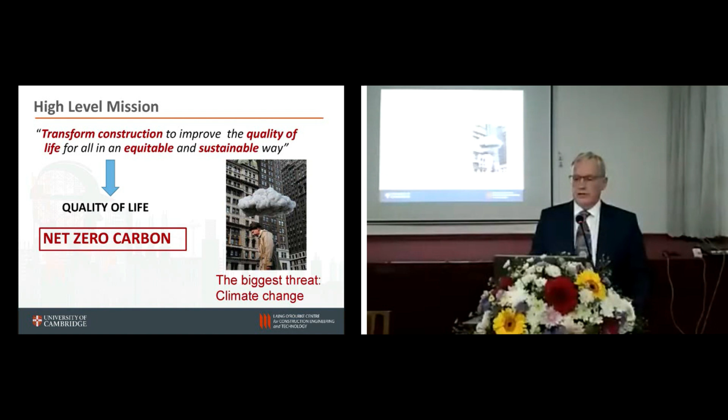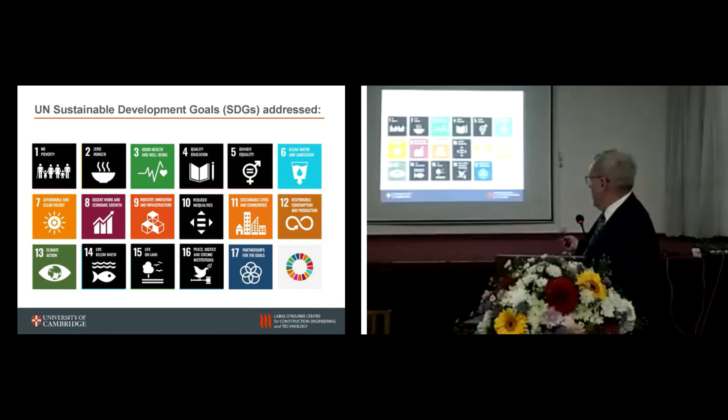So to start any lecture, and on the programs we do in Cambridge, I always ask lecturers to start with the following: put up the United Nations Sustainable Development Goals and say to the audience, which of these do we address and are trying to focus on during the lecture? I've blacked out those that are probably not so relevant, but you'll see quite a number of the 17 goals that are coloured reflect that the work we do impacts in different ways all of these things.

If you go through them, you'll see that we have such an important impact on society. Keep that in mind. Everything we do moving forward needs to be focused on how we improve the threat to humanity in our world from climate change. And remember that you are the future.

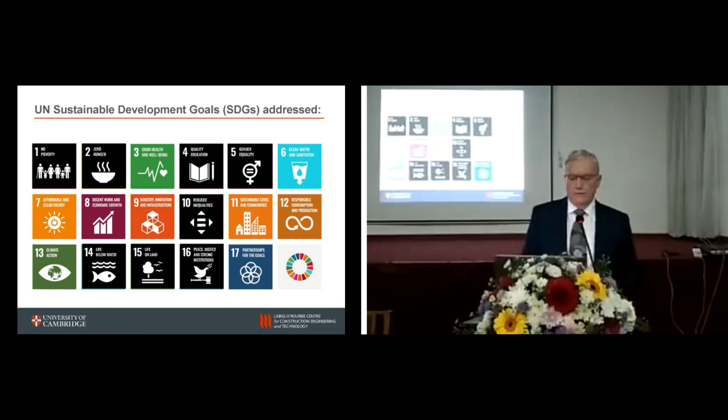So that's the background. What I'll do now is bring a few comments about this concept of data is the new gold, because I think there are many misconceptions out there about the value of this. So let's think about data in the context of the buzzwords you hear so often: data analytics, big data, AI, artificial intelligence, machine learning, and they're thrown around very widely.

In fact, these days in research, you'll find nearly every research grant gets submitted to do whatever, adds on the end, plus using AI and machine learning. Whether or not they do is a different question. So the question is, what are we going to do with that? Let's just think about artificial intelligence and machine learning.

Now, we're all familiar with the massive technology conglomerates like Google, Amazon, Facebook, and Microsoft, and they've all managed to monetize the use of data, the use of your data, our data, in a way to generate enormous value in a broad range of activities. So one of the things we need to think about is how that applies and benefits our society and our civil engineering.

Now I've got one example of something in the areas of civil engineering, which I actually showed when I was here in 2015. This is an interesting picture: it's actually by monitoring mobile phone IP addresses in London and monitoring traffic for a number of stations. If you monitor that and look at the density of the traffic, you end up getting what is a remarkably accurate map of the road network of London, and the density reflects the size of the road.

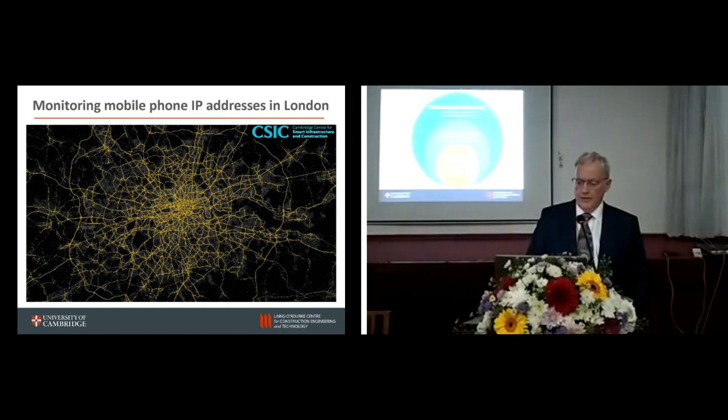This is a definition I obtained from the web of what some define artificial intelligence and machine learning as. Starting with artificial intelligence, they say it basically refers to programs with the ability to learn and reason like humans. Separate to that, the subset of that is machine learning, where we develop algorithms with the ability to learn without being explicitly programmed. That's the key bit.

And then as a subset of that, more recently, they've developed what is termed deep learning, a phrase suggested by one of the leading academics in this field in Canada, which is really a subset in which artificial neural networks can adapt and learn from vast amounts of data.

But the problem with these terms is they're being misused, in my view. If you think about what artificial intelligence actually is, it's an attempt to mimic the power of the human brain - to take in, process, and make decisions by absorbing data.

And I think most experts in the field contend we're a long way from doing that. The brain is such an extraordinary organ, an extraordinary computer. It can process and handle things - a very good example is computer vision. You can look at a group and extract information instantly that even the most powerful computers and programs in the world struggle to do. So it's a very large area of research, and we have a lot going on.

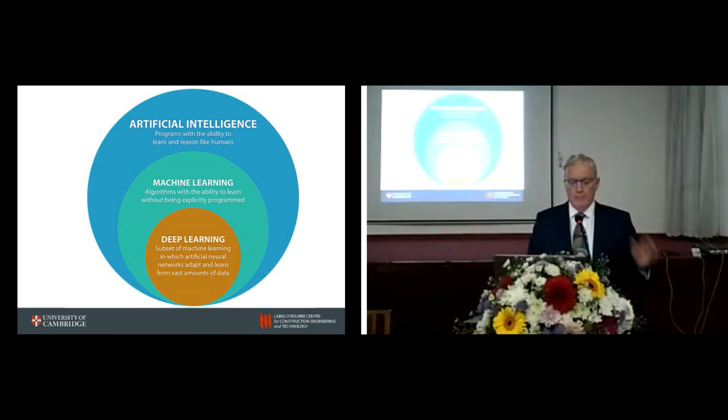But having said that, it's a huge opportunity for the future, and there are many areas where machine learning is incredibly valuable. So the question for us is, how do we use these tools to provide value in civil engineering?

And again, I think there's a mismatch here. There are some examples where we can collect large amounts of data, interpret and use it, but actually it's a real problem. In practice, unless the data has some link to the label or we know what it is, it's very hard to make that value case.

And I'll give you an example: cancer detection. There are huge opportunities by getting thousands of images of MRI or X-rays or scans of cancer versus scans without cancer, and training programs using machine learning to identify, for new scans, the likelihood of cancer. Enormous opportunity there, and there are many others where there's large amounts of data.

But I'd contend we're really in the early stages in civil engineering. So what I'll go on to do now is look at some of the questions we might ask, some examples of where data, or information we collect, informs what we do.

Now, I've put it in a context here. I happen to be a bridge engineer - that's my passion, I've spent most of my career building, designing, or doing research on them. So the questions I'm going to ask are related to bridges and bridge engineers. But what we do is exactly analogous and applicable to all forms of construction - buildings, dams, civil engineering infrastructure - but we'll do it in this context.

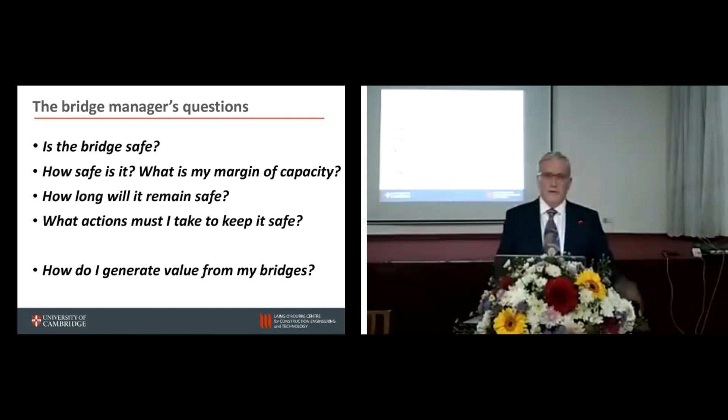So the first question is, what are the sort of questions that managers of structures are asking that we want answers to? Here's some examples. When I turn to the owners, the actual managers who have responsibility for the bridge network or road networks, the first thing they want to know is: is it safe? Is the structure safe, and how safe is it?

What's my margin of capacity or margin of safety above the loads that are actually running on it? How long will it remain safe? What's the life of the structure? And what actions, what maintenance, what repairs do I need to do to make sure it's kept safe? And finally, how do I generate value from the bridges? The bridges are there to generate value, to provide transport corridors.

But it's interesting because if I then go and talk to someone else, like a bridge assessment engineer, an engineer that does the calculations to see is a bridge safe - perhaps the loading is going to go up, or it's deteriorated, or there's a problem - they will ask completely different questions. First of all, they'll say, well, what are the loads on my bridges? What are the sizes of the trucks? How many trucks are there? What actually is the loading on it?

What is the response of the structure? You all do and learn how to do analysis. What actually happens in reality? What are the strains and stresses? And also, importantly, how does the condition of the structure change with time? We assume everything is new when we design a structure, but with time it deteriorates.

So in fact, what we're really asking is, can we answer questions about how are our bridges performing? That's the goal. And what data, what information do we need to understand that?

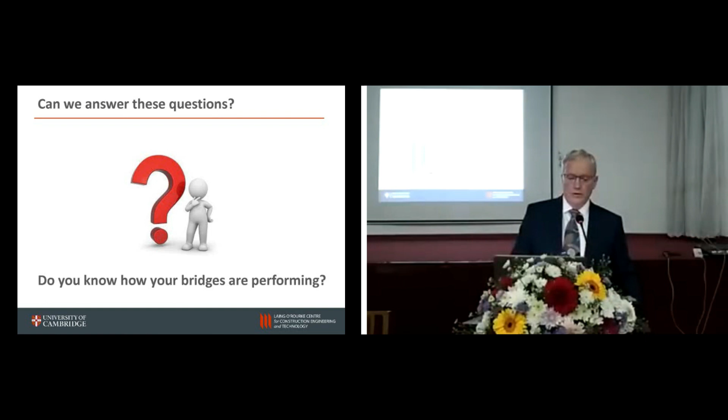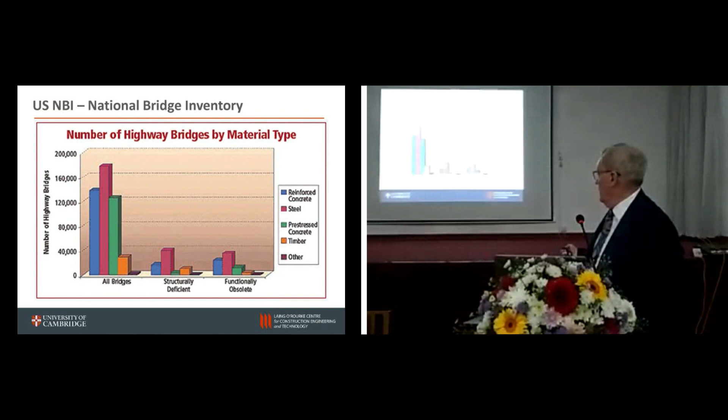And importantly, what proportion of these total number are what they call structurally deficient. So they've been analysed, assessed by structural engineers and said they're not adequate to carry the loads they're intended to carry. So they're unsafe, so they need strengthening or repair. And the other lot are functionally obsolete, no longer suitable for what they were designed for. So they may be too narrow, might be the load capacity for what's needed, whatever.

But actually, if you look at these numbers, it's a huge percentage. Something like a couple of 100,000 bridges in America need work, need replacing, need strengthening. That translates into billions and billions and billions of dollars. If I translate that into rupees, it's a number with so many noughts you don't want to even think about it. Huge problem. It's true all over the world.

The second interesting thing is to look at why do bridges fail? What are the causes of failure? And if you think about what you do in your design, in your analysis, and in your training, most of the focus is, will a bridge be strong enough under the live loading you read in the code? Particular traffic loading from trucks or in rail loading. Nearly all the focus is there.

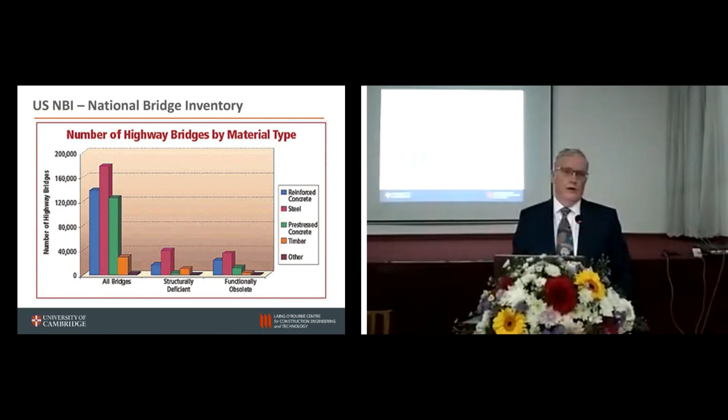But there are many other issues facing the bridge community, and one of them is the vehicle loads that we are now putting on our roads is much higher than it was when many of them were first designed. And this is an example of a particularly heavy load in the UK. But just since 1982, which for me is not that long ago, 40 years ago, the legal load limit, the size of trucks in the UK, was limited to 32.5 tonnes.

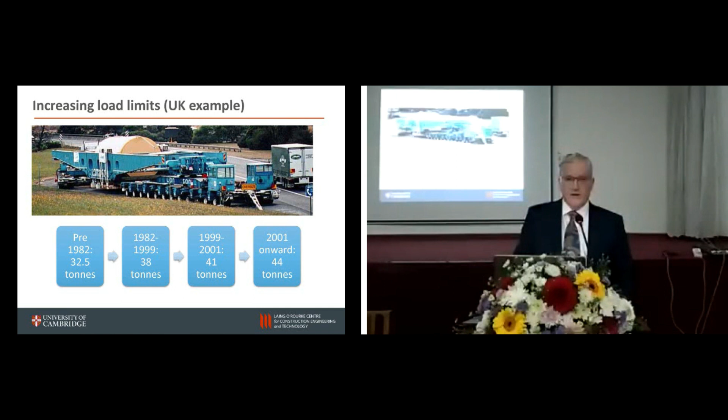If you move forward, it's changed and progressively got bigger and bigger over the last 40 years. And back in 2001, it went up to 44 tonnes, and there's pressure to go beyond that now. So there's pressure all the way to increase the loading, but the bridges were designed for lower loads. Secondly, there's the amount of trucks that are illegally overloaded. And this is a bit of a frightening video, but I thought you might like to see this.

Big heavy truck going on an overpass, and there's a joint here in Italy, 2016. Tragically, that driver was killed. You see the vehicle there resting over the end. There was what's called a half joint, a little hinged infill joint, that collapsed. But it was because a grossly overloaded vehicle was on the road.

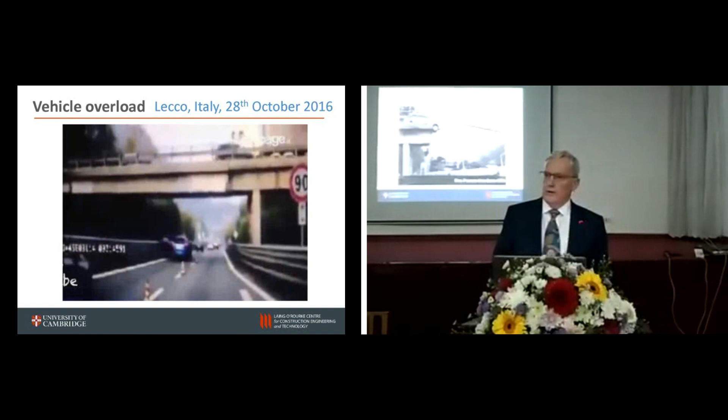Could we have had warning of that? How would we have known about it? How could we have measured the load on the truck? How do we know what the capacity of the bridge is?

There's another issue as well. When you design bridges, there's a code of practice that has a model of what they think the maximum loading you're likely to get on the bridge is, and you design for that. How accurate is that? What actually happens on bridges?

Hamburg in Germany, 2007, there was a strike, and as a result, the police changed the use of the bridge. You'll see they put all the very heavy trucks together, back to back, in two lanes. No bridge is ever designed for that sort of loading.

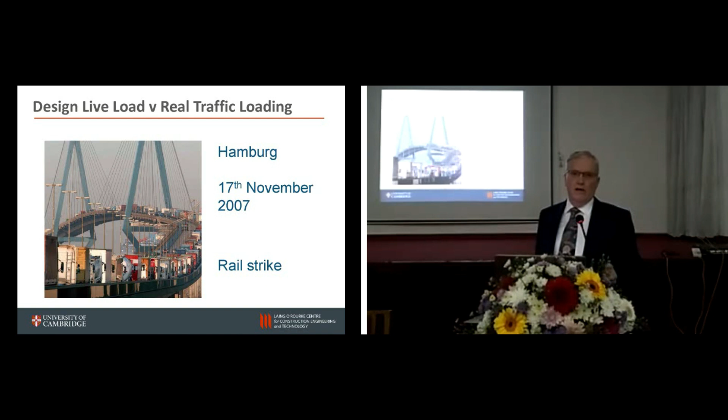So could that have risked the bridge falling down? The question is, do we have data on what the real loading on bridges is? And the answer is we don't. It's quite frightening how little information we have.

And then there's the issue of deterioration. That joint on the bridge that collapsed is what's called a half joint bridge, where you get a step and an infill beam dropped in. This is one from Canada, from an inspection in 2004, where you can see some cracks and problems there.

Sadly, in 2006, that bridge collapsed and that joint failed. It came down and killed a number of people. And yet it was inspected not long before that, and no one picked it up. There was no mechanism for getting data and information to inform them.

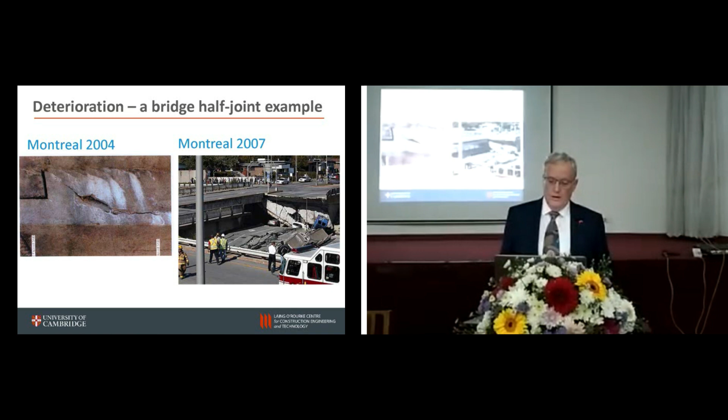Similarly, and quite scarily, you see the condition of this one. This is taken from the busiest motorway section in Europe, part of the M6 motorway near Birmingham, England - that's the big complex interchange there. This section, close up, is a joint of these so-called half joints. That's still there. We went up and inspected it, and we have absolutely no idea what's really going on, how strong it is, and it's a real concern.

So we don't actually know what a lot of our structures are doing. You design them with a big factor of safety and think they're okay. In practice, we never go back and check or measure the loads or the actual stresses, condition and strain. So if you think about design, we have a load deflection plot for a structure.

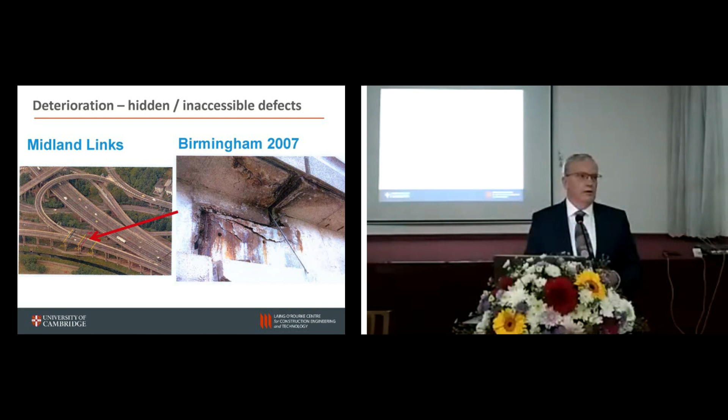When you go and design it, you design for some so-called serviceability limit state, a safe level to represent what you'd expect in day-to-day loading on a structure. But of course, we have a margin above that for the ultimate limit state, the limit state at which it will break, it will actually collapse. And we have factors of safety to allow for that.

In practice, if you tested any of the structures we build and design, the vast majority, if tested for failure, would likely fail significantly above the ultimate load. Not all, but well-designed, ductile ones normally have inherent reserves of strength. The problem is that we don't measure where they really operate. We have no idea where on those curves our structures are operating.

So how do we try and find that out? You rely entirely on your designs, theoretical calculations. Very rarely, except in research, do people go back and check.

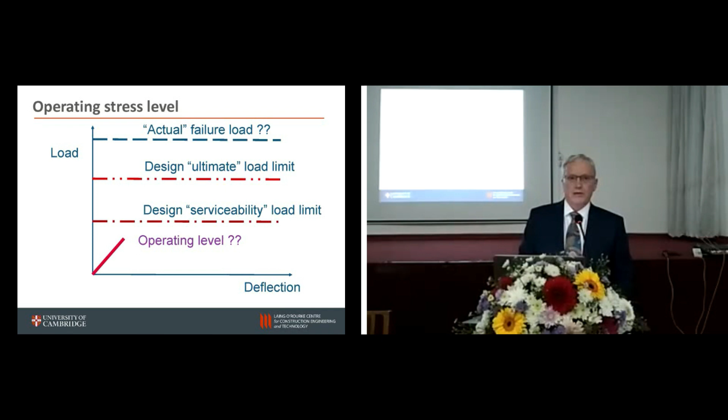So what do we do as a way of managing all our bridge stock? This applies to many other infrastructure. The vast majority of our infrastructure, all aspects of the transport network, are managed purely by visual inspection. You go out, like this one on a cherry picker, you get up there and look at it and say, does it look okay? Do I see any cracks? You don't actually measure what's going on, so you have no idea what's really happening inside or underneath. You have no idea how heavily stressed it is, and you don't actually know what the loads are. But we rely on this visual inspection.

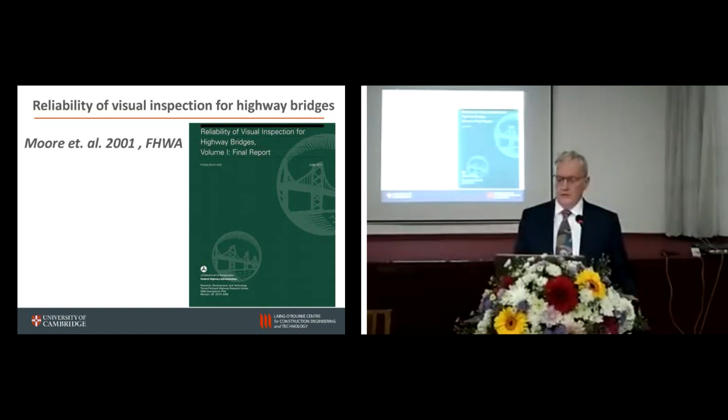So one of the questions is, how effective is that in determining the condition of structures? There was a really interesting study back in 2001 done by the Federal Highways in the United States by an academic named Moore and a group of others on the reliability of visual inspection for highway bridges. That document is freely downloadable on the web, a 400-page document. Any bridge engineer, it should be compulsory reading. This will give you a big shock. I'll just give you a snapshot of some of the key results from this particular document.

What they did is they got together 44 trained bridge inspectors that do visual inspection throughout the US, and they had a small subset of a couple of bridges that had been inspected in detail by experts to determine what defects or problems were on the bridge. So they had a known situation with a number of bridges. Then they brought the inspectors in, had them do a normal inspection as you would in practice, and tell us what's wrong with the bridge.

And this is what they found. For a number of different types of deficiency, the second column is how many inspectors inspected it, and the third column is how many of those inspectors identified the known defect. The first one, paint system failure - on a bridge it may be painted steel beams or guardrails. They were reasonably good at seeing flaking off paint, but even then only two-thirds of them identified it. A third of them didn't even see the paint flaking off.

As you go down, corrosion - clear visual evidence of corrosion - only a bit over half detected it. Then more serious, member distortion, so warping, potential local buckling, problems that could lead to significant failure - only 10% noticed the problem. Fabrication error, something's in the wrong place or didn't fit or wasn't working properly - almost no one, 2%, they just didn't see it. And crack indication, the bridge with a great big crack in it, only 2% even picked it up during the inspection.

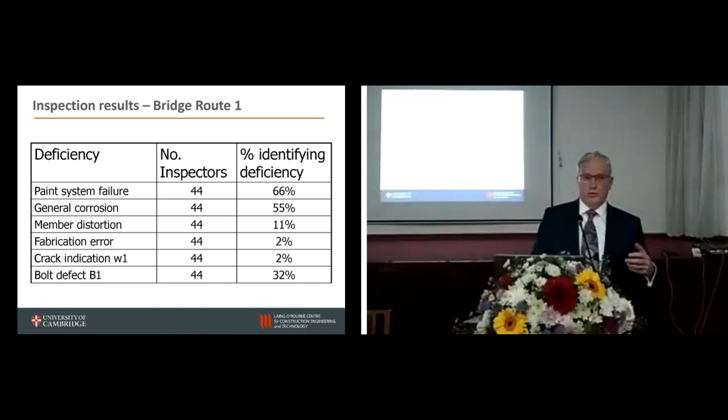And it actually led in the UK to an introduction of a new program to try and improve the training. We have a certification system now to develop competency for bridge inspectors, because what we found is bridge inspectors often were untrained. So they're going out detecting whether a £100 million bridge that could kill lots of people is safe based on almost no training and this accuracy of inspection. It's a bit like going to your doctor because you're worried you may be sick, and you go to the front counter and the secretary at the front desk does the diagnosis. Even that secretary thinks you may look a bit unwell, then calls the doctor in. That's the analogy.

Interestingly, they asked the question, why do bridge inspectors not perform well? And there are a whole lot of interesting human factors that I'd certainly never thought about before, and you may not have. There are human factors like these people are employed to do a visual inspection where you rely on good eyesight to do it, and half of them had poor eyesight, had never had an eye check, and were colourblind, so you couldn't see things like corrosion. Visual inspection, but you don't check they can see.

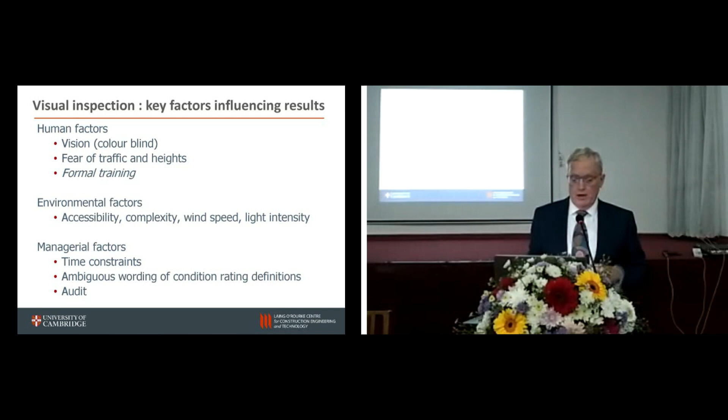Things like that - fear of traffic. Often you're exposed to lots of fast traffic nearby, and you're scared, so you do it quickly, you don't look properly. Lack of training. And there are a whole lot of other things - it's windy, cold, dark when you're doing it, so you don't do it properly. And as usual, managerial constraints - they're never given enough time or resources to do it properly.

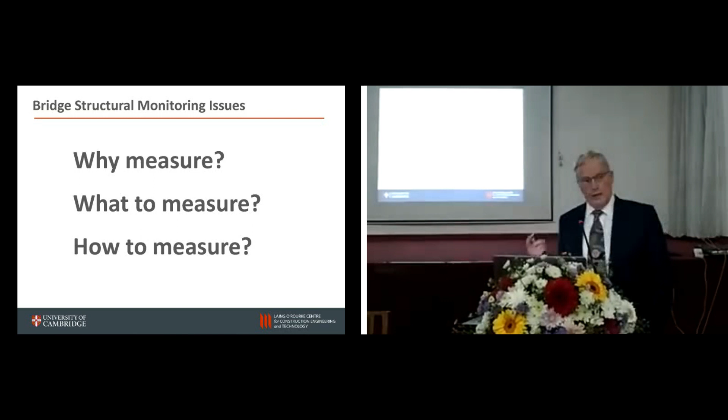So it raises the question with structural monitoring issues - in other words, what data do we need to collect to understand the performance of our structures? First thing we've got to say, well, why should we measure? I've tried to answer that with the problems of visual inspection current methods. Then it becomes, well, what do we measure? And then how do we measure it? This is an ongoing debate.

And what happens is you find there's a disconnect between the researchers looking at structural monitoring and the owners and the managers. The researchers who think we should do structural monitoring look at things like, well, with the sensors we can get lots of data, it's really valuable, we make these smart structures that tell us what's going on. But the owners think, well, this is going to take lots of time, I don't really see the value of this data, and it costs lots of money. So there's constantly a debate going on.

We were involved in a project a number of years ago called the Walton Bridge over the River Thames, the main river in London. This is a picture of the final bridge that ended up being built there.

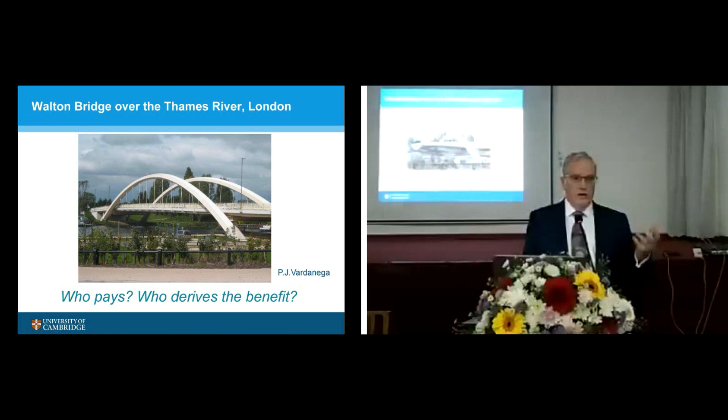At the time, when they were first planning it, we had a very progressive client, a local council, who was really interested in getting structural monitoring to get information about his new bridge. We had a designer who was at the cutting edge and really wanted to put in structural monitoring to understand the performance of his structure. We had a good contractor who was interested in doing it as well, so he understood what was being built. And we were involved as researchers.

We sat down and said, here we are, we've got a new bridge, we've got an enthusiastic team of people delivering it. What are we going to measure? What sensors will we put on? We spent an afternoon together and we really struggled. And by the end of it, we said, actually, we can't justify this, and we did nothing.

That led me to a lot of earnest consideration of what is the value of monitoring. The net effect is that we've had a number of PhDs and projects since then asking that question, coming up with some answers, which I think do answer the question. I'll show you where they're presented. In fact, some of the work that Kasun was involved in was part of it.

The bottom line is, if you think about it, most structural monitoring is done in response to a problem, where a client says, I've got a problem with my bridge, can you tell me what it is, or is the structure safe? And you go in and put some sensors and measure stress and strain or whatever after the fact. Rarely do we put sensors in at the beginning to measure the performance, how it compares with the actual design, and whether it's deteriorating.

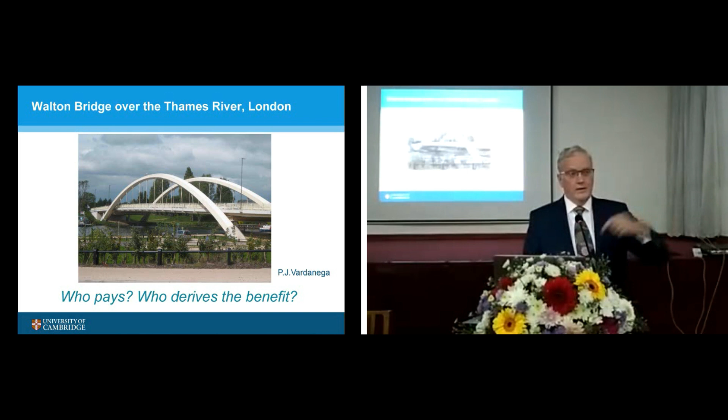The other question is, who pays for it? Does the client pay for it? Does the designer pay for it? Does the contractor pay for it? And who gets the benefit? If a consultant specifies a set of monitoring to go on a bridge, they don't want to pay for it. They don't get much benefit, other than perhaps improving their designs, but many designers don't want measurement because it might show they're wrong — and if they were wrong, they'll get sued. Similarly with contractors. So it's a really difficult question.

Having said that, after a lot of thinking, we eventually put all our learning together and published a book with the ICE, with some colleagues of mine. We've tried to outline the answers to why you should monitor and how you should monitor. I would now contend that for most structures, and certainly signature structures, we absolutely should be monitoring. As a profession, we should be monitoring widely so we understand better how our structures perform, and we can modify our codes of practice and behaviour. You'll see from some of the results that we can actually make substantial savings when we do that. So that's some background to the monitoring.

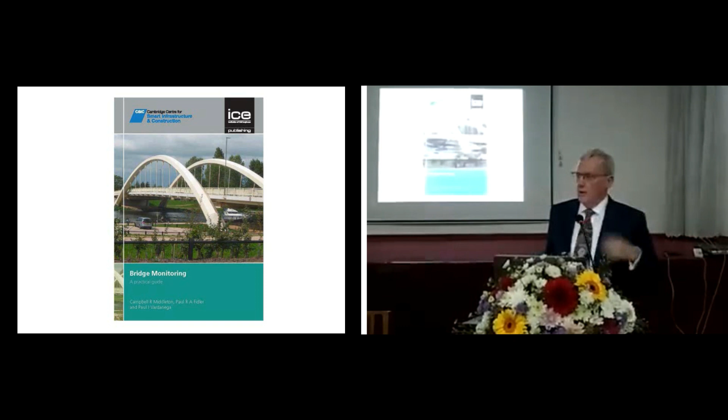Is the problem there? The next one is reinforcing steel corrosion. We still cannot detect or predict reinforcing corrosion inside concrete structures. There's a huge industry trying to do it. In fact, in Britain just at the moment, I got advised in an email this morning that the National Highway body had launched a program for what they call the 'moonshot,' inappropriately, to try and find an improved method of corrosion detection.

Fatigue of steel and concrete — we still have very little data. There are historical theories behind it, but we don't actually measure it on our bridges.

The ability to know the in situ strength of our materials—we can do sample testing, but in relation to the real strength, we use characteristic and tabulated strength. How different is that from reality? And finally, the big unknown is loading. We just don't know what the loading is.

What I want to do now is, having tried to set the scene and make the case for why we need to do some monitoring and get data, address the challenge that if we collect the data, we must make sure it's of value.

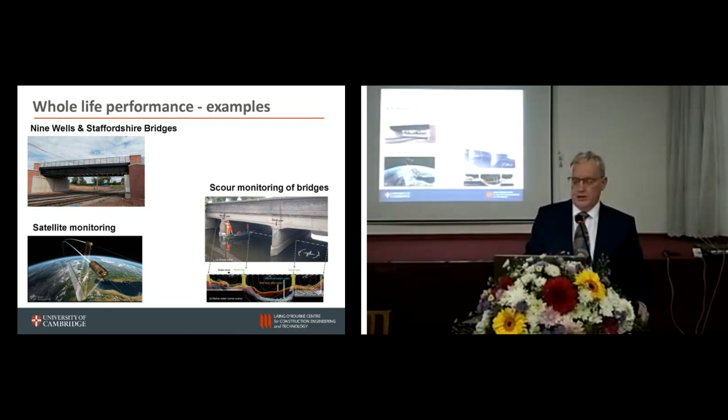I've got a couple of examples of bridges we've been working on over some years. We first started in structural monitoring nearly 17 years ago and got into the use of fibre optics. A number of different aspects were covered, one of which was the PhD work of Dr. Kasun, so I'm a bit nervous giving this—correct me if he's here and I get anything wrong.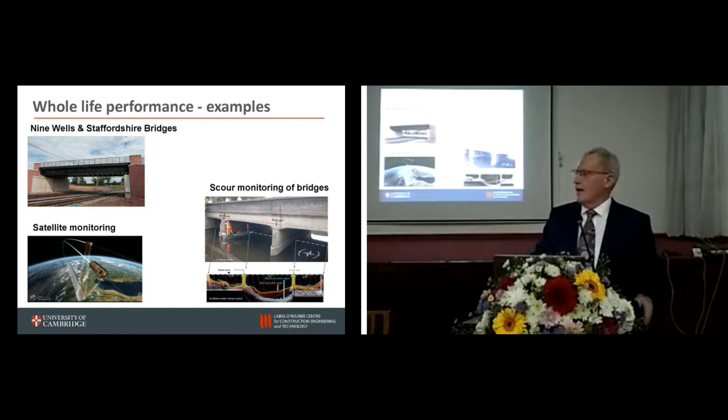Right, let's start with fibre optic sensing. This is a really interesting technology we've been widely using, particularly in the offshore oil industry and a number of sectors around the world. It's less widely used in heavy civil engineering, but we've been doing it for many years, and I'll show you some examples. Typical fibre optics, the glass fibres you use in telecommunications, act like a nervous system in the body to detect what is going on in your structure. There are some extraordinarily clever things you can do with it.

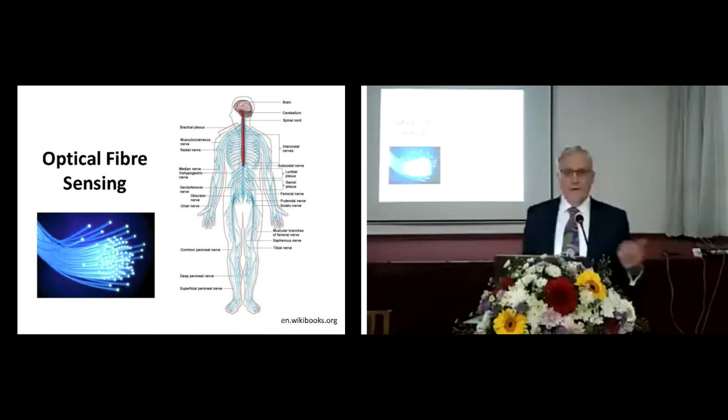There are a number of different techniques. One we've done a lot of work on, though only a small number of groups in the world use it, is called Brillouin Optical Time Domain Reflectometry, BOTDR, and its variations. Basically, you get a long fibre optic, plug it into an analyzer—a very expensive, complex electro-optical device—and stretch it out, glue it inside a beam, onto a pipeline, or inside concrete structures. Once it's inside, you send a light pulse, a laser pulse, along the fibre optic. If at some point along the structure it strains, that changes the reflective characteristics of the fibre in a way that gives a reflection back, and by measuring that you can quantify the degree of strain.

There are limitations. This particular technique is relatively slow, so it's only suitable for static applications. The gauge length you can interpret is getting better all the time, but it's typically between about 200 and 500 millimetres, so it's an average strain, not a point strain. However, you can do this over kilometres—you can literally put this along a kilometre-long pipeline and measure strain all the way along. That's being done in the oil industry, water industry and others, and we've put these in a large number of tunnels, wrapping them around tunnels. It's one very interesting technique to measure strain, and you can also use it to measure temperature.

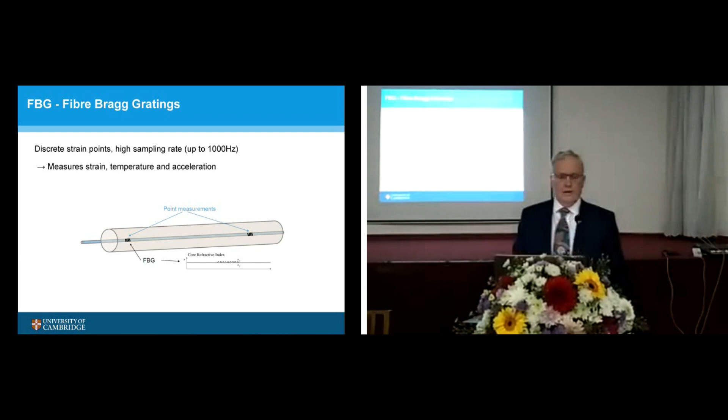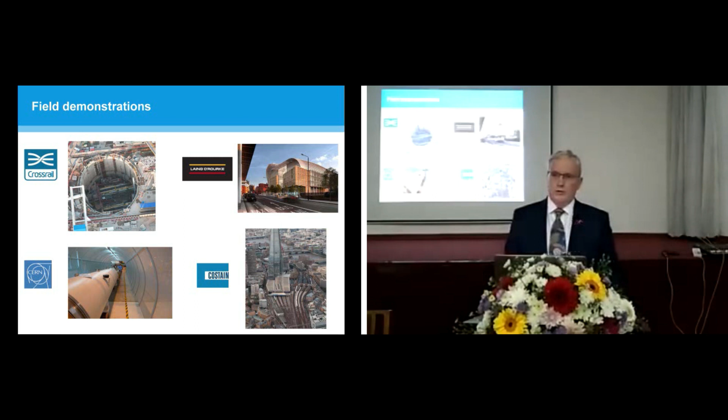What I'll do now is show some specific examples of the sort of information you get. This one is a bridge called Nine Wells Bridge in Cambridge. Here's the bridge, a 3-span bridge, and that red line represents the main train line on the east coast of Britain from London north. It goes under here, and the bridge has large footings, large pile caps, and a large number of piles going down 22 metres. The designer was very concerned that if these foundations moved at all, it could affect the train line, and that would have huge cost implications.

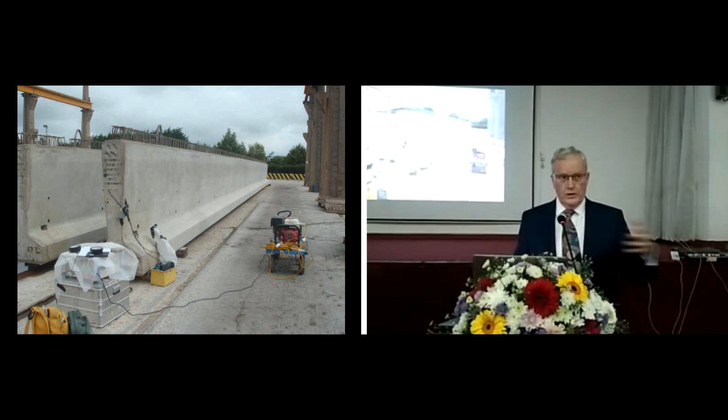So he was quite conservative in his design, and we put fibre optics in the piles and the beams. Here are the beams, and you can see the wires sticking out - we've got fibre optics running along that. That was really interesting, because we actually did it in the factory where they were built. We tracked through the whole process of manufacture, transport, erection, construction, and operation, and we could follow the losses experienced and the changes with time due to creep, shrinkage, relaxation - all the things those that do pre-stress concrete learn - and we could plot them.

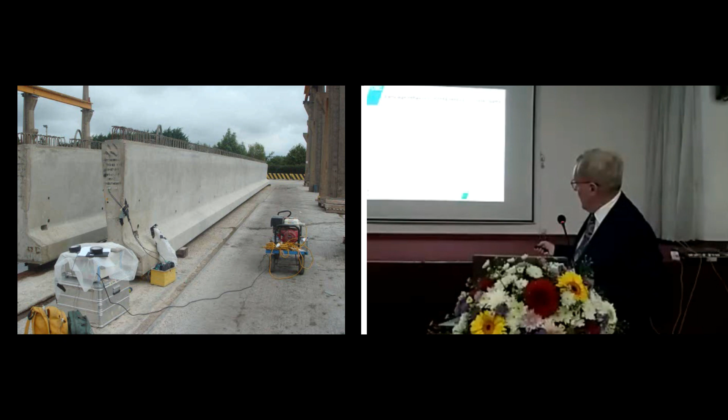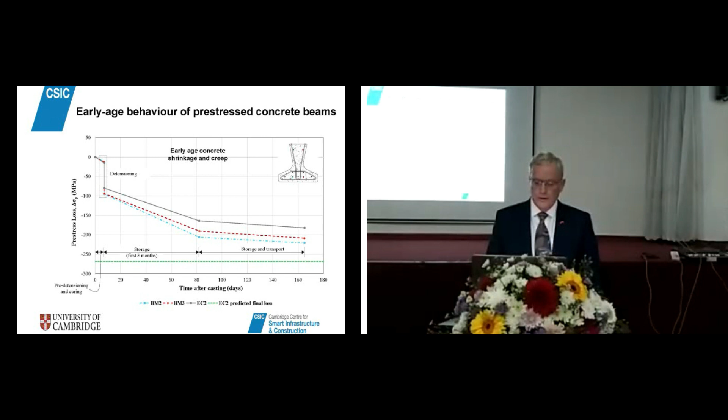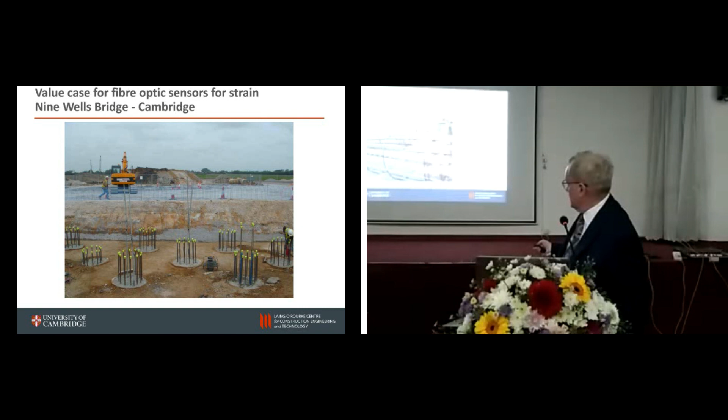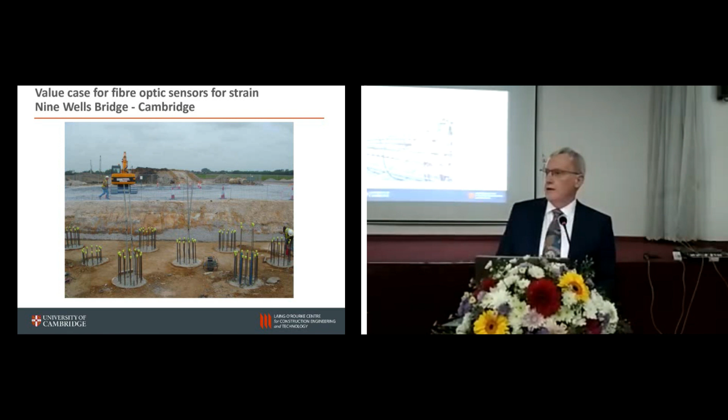What was interesting was to find the actual load in those piles. Many of you will have designed piles, and we make all sorts of conservative assumptions. We can go and do testing by putting a heavy weight on to see if it fails, but has anyone ever measured what the load in the piles in a real situation is? Well, this is certainly the first time I've ever been involved in that.

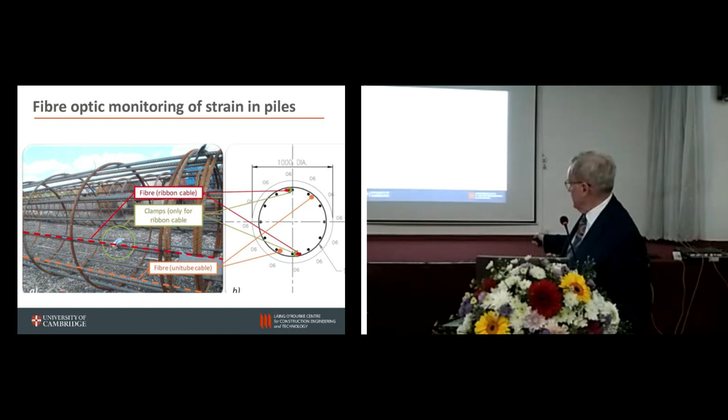It was quite interesting. This is one of the data sets for the load in a pile, 22 metres long, measured with the fibre optic. If you look at it, this is magnitude of load from 0, and this is depth here to 22 metres. This is a bit of noise as you go down, but at about 4 metres there's some surface effects with the soft soil. Basically, there's no load in the pile. So those piles, of which there are a very large number, aren't really doing anything - what's actually happening is that the load is being carried by the big pile cap as a spread footing. If you looked at the number of piles in that structure, that's probably millions of pounds wasted because we were so over-conservative. So that's one example.

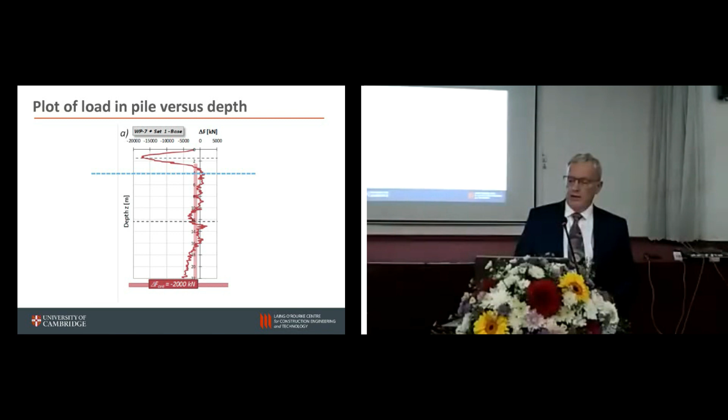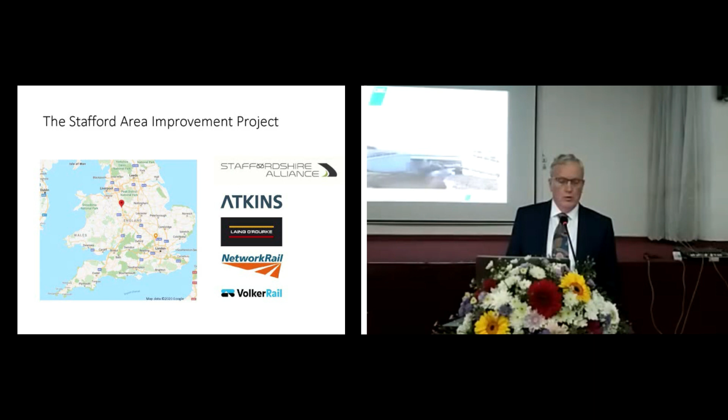Let's look at some other bridges. A few years ago, we had an opportunity to do 2 brand new rail bridges from Network Rail, the main rail operator, in a consortium in a place called Staffordshire, the middle of England, shown there in the red dot. It was a great chance to try some new bridges. The first one was a concrete bridge called Under Bridge 11, which is only 12 metres span, multiple Y-beams as they call it, with infill concrete deck.

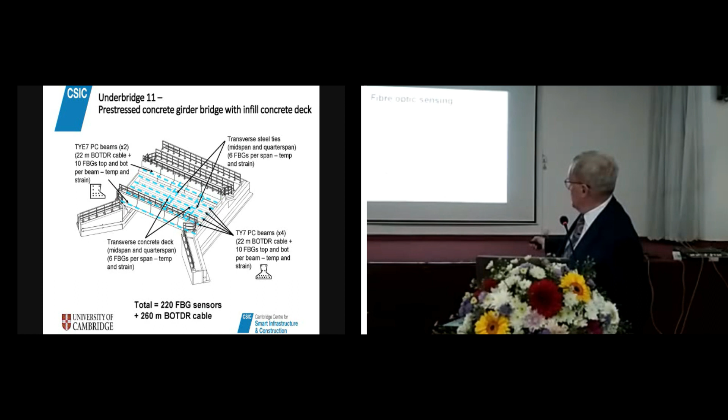What we did - that's a mock-up of the deck with all the fibre optics. The blue shows some of it, we've got transverse and longitudinal, top and bottom of the beam, shown in this cross-section.

We didn't do every beam, we did half the beams, one on the other side to look at symmetry, purely to save cost. The second bridge we did was a steel bridge nearby.

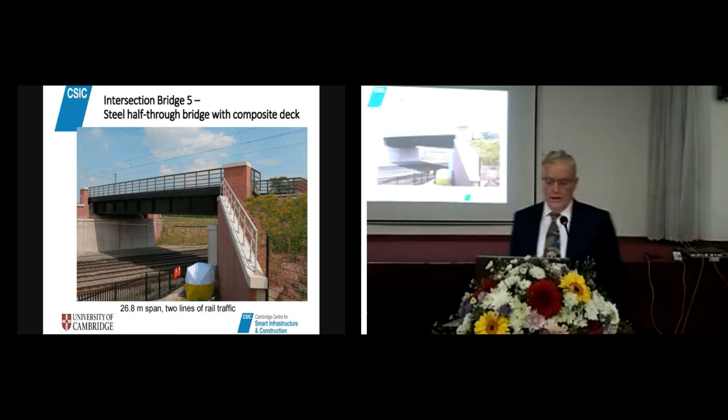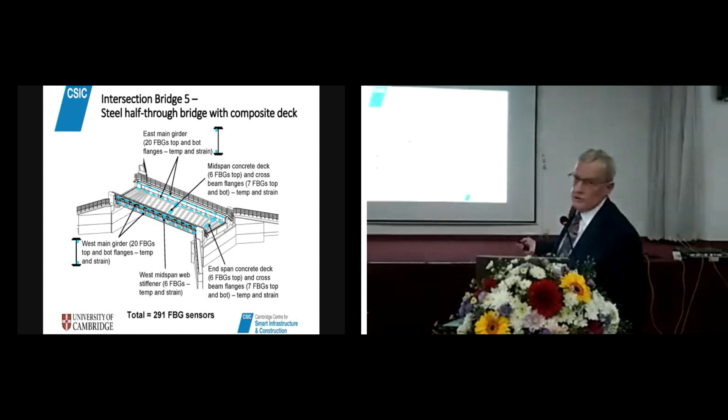This is what's called a steel half-through bridge. Again, two main steel beams, transverse steel beams, and a composite concrete deck. The blue shows the fibre optics. We have 291 fibre Bragg gratings in that one, and we had a large number.

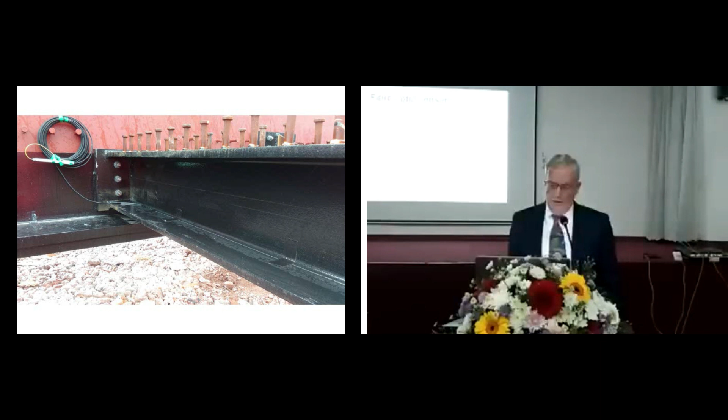How many was in the other one? I haven't got the number there. A similar number in the other one. And here's some pictures of them being built.

The bridge itself, we put additional sensors on. These are accelerometers, laser detectors to measure the train wheels. And what we were doing is those lasers are there to monitor the position of the wheels.

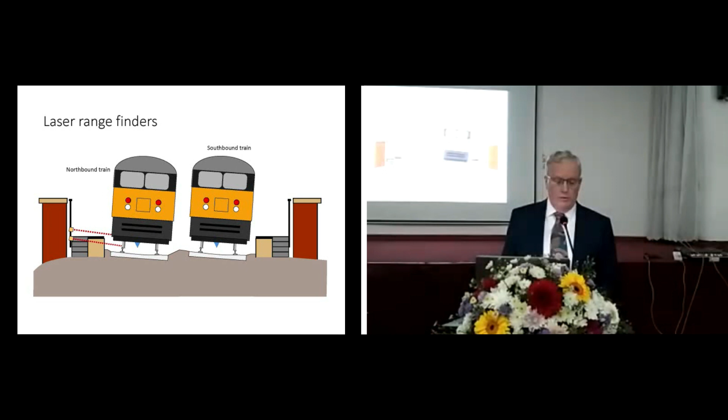We use that because we're developing a load monitoring. The bridge was actually a weighbridge. And here's the sort of results we get. The graph in the top right shows the data real time coming through a train crossing.

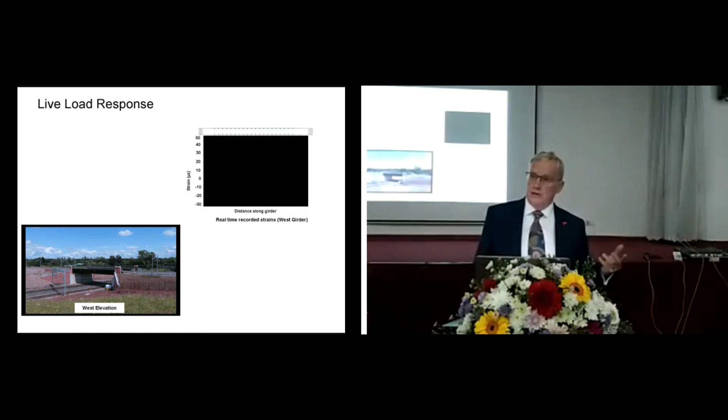So what we're doing is we're able to measure real-time the strains in those members of the bridge. And our goal is to move forward with that and develop a digital twin to represent the data. So we take the data from the sensors into our database, visualise it. We have various analysis models for the weight of the bridge.

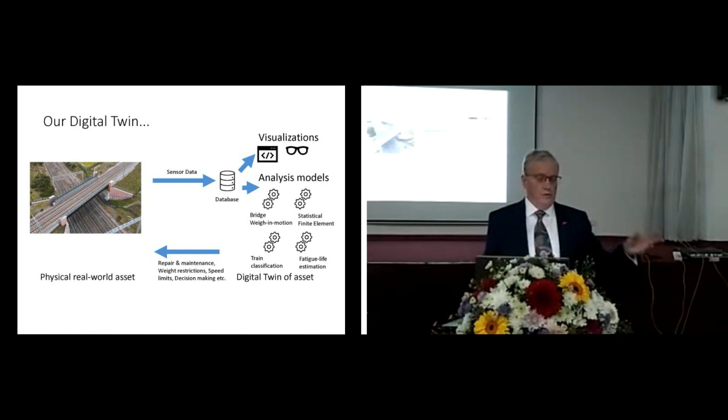We do some finite element of the stresses. And from that, we can work out estimates of the fatigue life, condition of the bridge, and all these questions I was asking earlier, and that can inform repair and maintenance decisions.

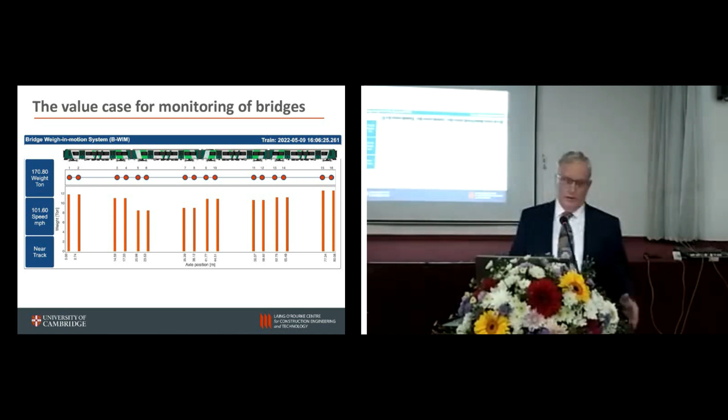To my knowledge, there have been attempts at this, but this is the first time, where I understand, this is going to be a permanent installation for measuring the loads of bridges. And what comes out of it is the interesting thing.

So in fact, on this bridge, you could have quadrupled the load and you'd still be under the serviceability limit. It's operating at around about 12 to 15% of the load. And the designer thought it was heavily stressed. That's a huge factor.

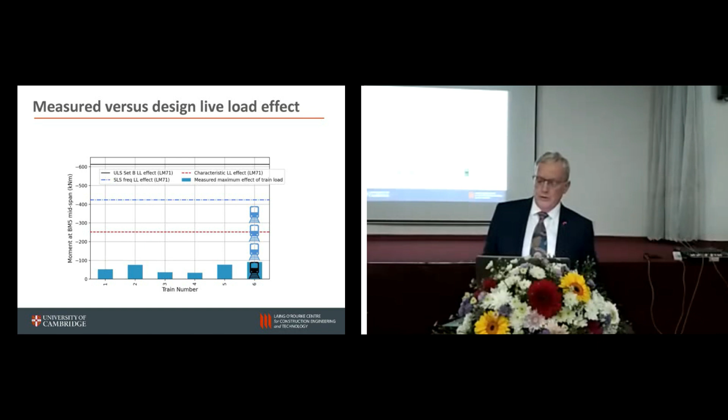Now look, I've only got a few minutes left. So what I'll do, seeing I've got the opportunity, I'll just quickly mention the work that Kasun did, very briefly, because I think this is some of the most original work in this field being done anywhere in the world. So we'll just quickly look at scour.

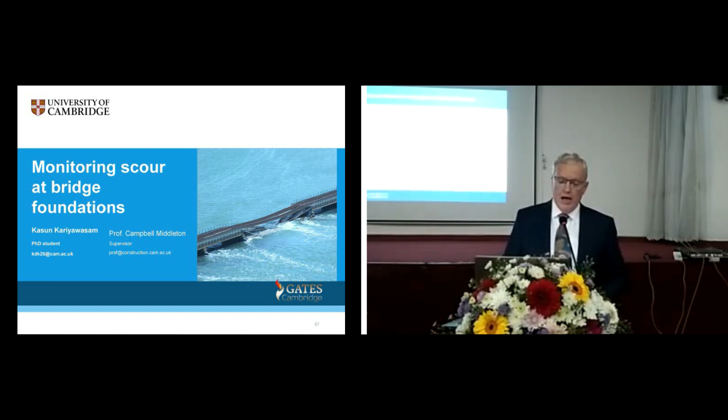Scour basically refers to the loss of material under a foundation due to erosion, due to the water movement, particularly in floods. And the problem is, at the moment, it's really hard to inspect hidden down underwater, and often they just send divers down to have a look and feel around, and prod around. That's about the best you can do, but it's very dangerous and very expensive.

And here's an example of what happens when you have floods. A fully loaded container vessel somehow or other got in the river, smashing up against a bridge.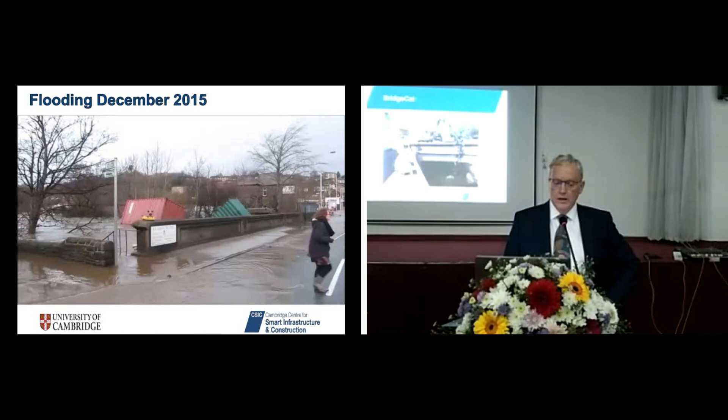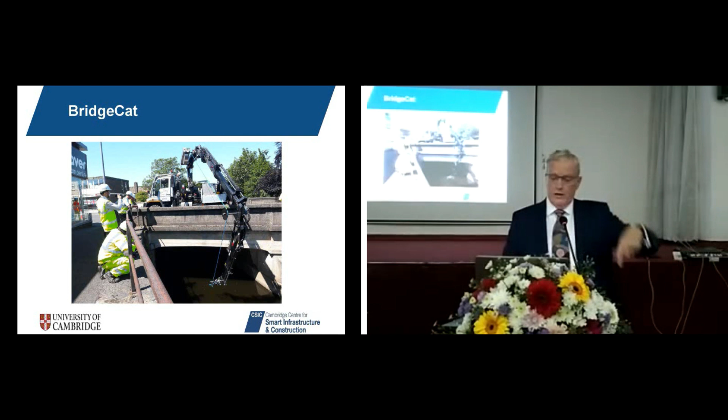And there's a device that's been developed in the UK called the BridgeCat, which is basically a sonar on the end of like a crane arm, which goes underneath and generates sonar images of the cross section. So there we can see the piers, and this is all showing the eroded scour underneath that pier there.

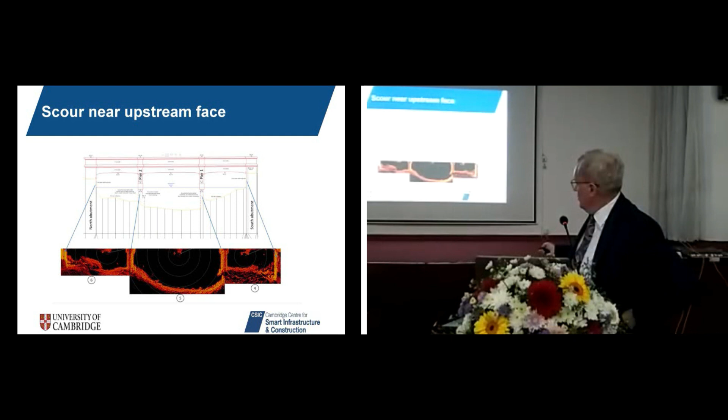So they're worried about it. So what they needed to do was repair it. So the plan was to go in - this represents the scoured material.

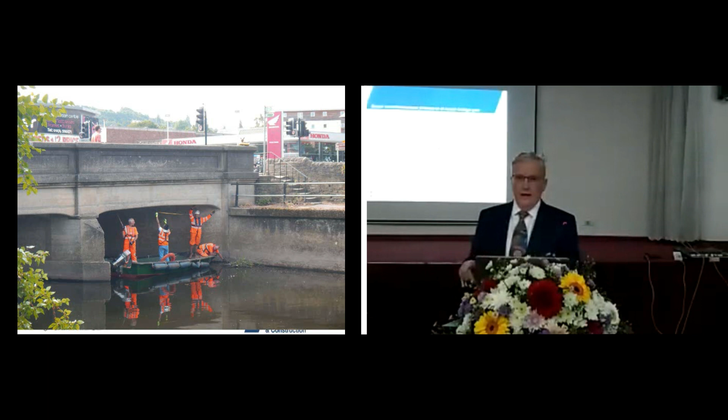It's not all the way across, and they're going to fill that up and put a concrete capping on it. So it's a fantastic and unique opportunity to measure the behaviour of the bridge while it was in a scoured condition. Then it was repaired, and we could measure again afterwards, so you get a before and after. That was quite a unique opportunity.

Here's Kasun and his team and some of the operators measuring it up and putting the sensors on. And they ended up putting accelerometers, a vibration method, onto the piers and deck.

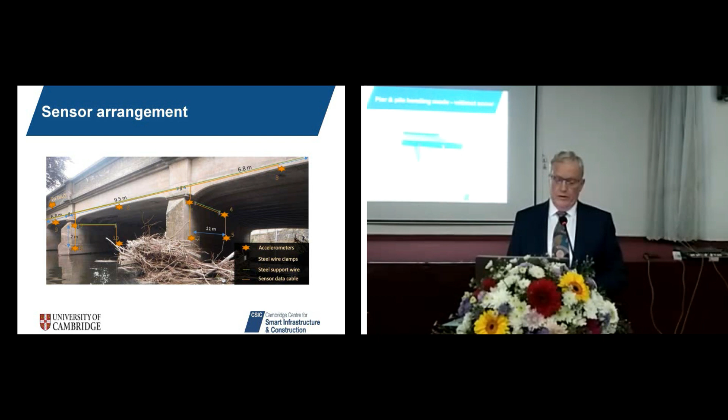What he did was measure the vibrational response of the structure, in particular the piers, without scour. You'll see 17.1 hertz. Then he did it again with scour. He did it with modelling, he did it for real on the full-scale structure, and he also built some models in the centrifuge. So really, he did three PhDs in one.

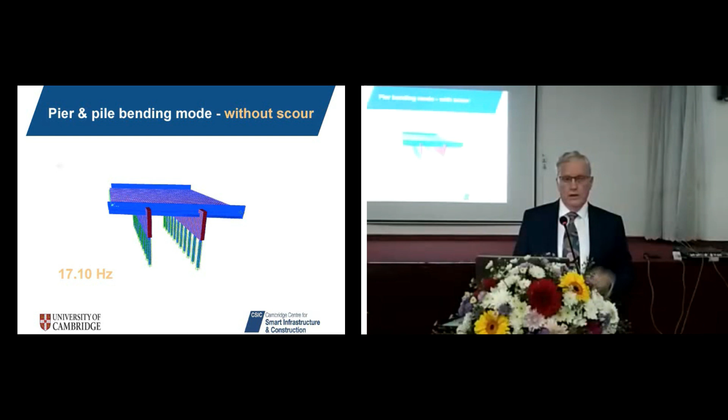It was quite extraordinary. But the clever bit was that he analysed not just the vibrational modes, which is what most researchers around the world have done. He went one stage further and looked at the mean spectral density of the response over a six-month period, and found this trend when the scour started. It then was decreasing, and when the scour ended, it levelled off. So you got this distinct change.

Now, no one else in the world has done that. What he's shown is this technique for piled foundations, and at this stage it's only piled foundations, could be remotely used to monitor and give warning of scour. No one else in the world could do that.

We're very lucky but unlucky in that National Highways was going to set up a £1 million contract to take Kasun's work forward, but then COVID came in. They'd actually awarded the contract and then pulled the plug, and then we've had COVID. So it's an opportunity for the future. I was in Australia last week and all the bridge owners there were really interested in that as well, Kasun, so you better pop down there and tell them.

Really original work, and interestingly, from a student point of view, Kasun came up with this idea to do vibration monitoring. I was really reluctant because I've seen a lot of vibration monitoring around the world using what's called modal analysis, and most of it, in my opinion, makes very little sense. It doesn't actually give you the damage measurement you can get. I was sceptical, but Kasun had done the homework and was very keen to do it. To give him credit, we've gone forward, but he's done some really original work.

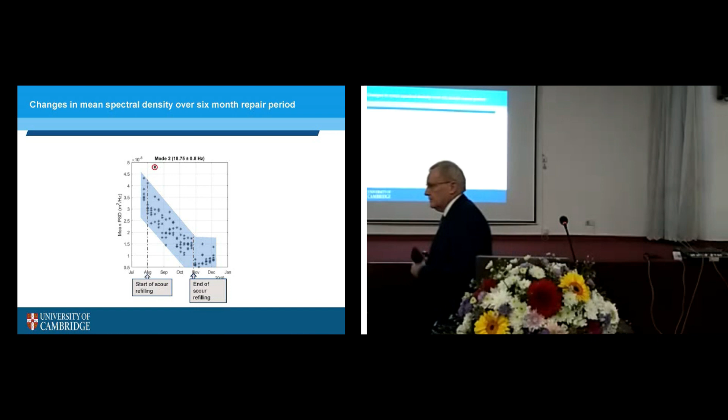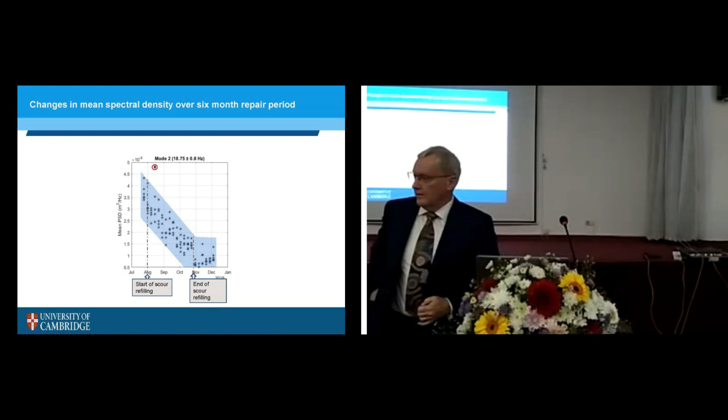And there are many real world...